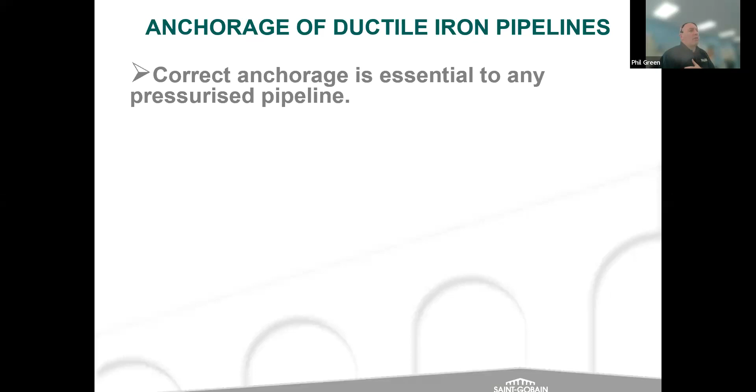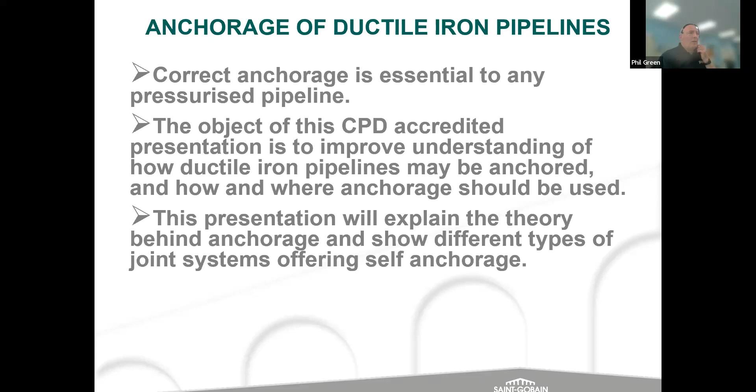Correct anchorage is essential to any pressurized pipeline. The object of today's presentation is to improve understanding of how ductile iron pipelines might be anchored, and how and where anchorage should be used. We'll talk about some of the theory behind anchorage and calculation processes, then look at different types of joint systems which offer self-anchorage, and at the end touch on a computer program we have that enables us to understand anchorage requirements on a project.

So this is all about how we might restrain push-fit pipes and anchor push-fit systems.

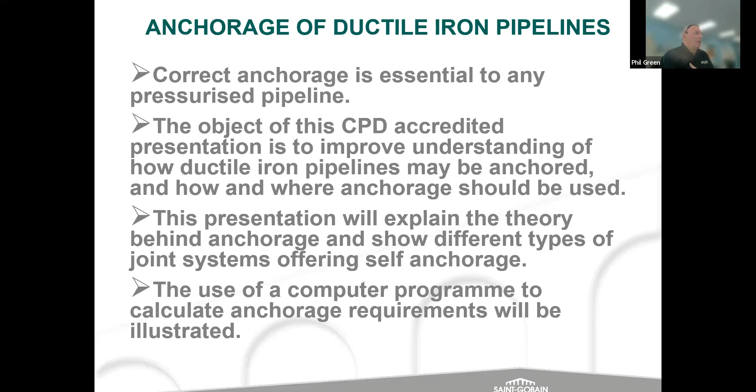Unless, of course, pipelines are laid in a dead straight line. There's an example here of a pipeline in Abu Dhabi, which Martin Addison knows a lot about, a long straight pipeline. Where there are no bends or T's or changes in direction, there'll be no sideways thrusts to encounter, so long straight pipelines often don't require anchorage. It's just about when you come into changes in direction or changes in pipe size or any other introduction of a fitting into a pipeline where you might need anchored systems.

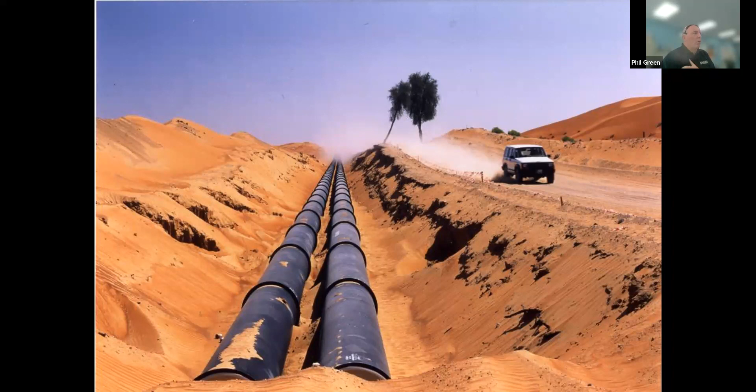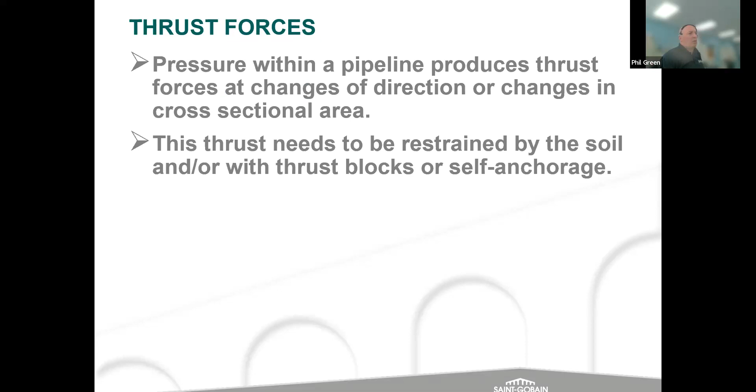So to understand thrust forces: pressure within a pipeline produces thrust forces at changes of direction or changes in cross-sectional area. These thrust forces need to be firstly understood and then restrained by the soil and/or with thrust blocks or a self-anchoring system. Thrust forces arise due to internal hydraulic pressure acting upon the cross-sectional area of a pipe.

The direction of the thrust depends upon the shape and orientation of the fitting. Thrust forces are calculated by the pipeline pressure multiplied by cross-sectional area, and that can be different depending upon the direction and shape of the fitting in a pipeline. So you could have bends, angles, T's, tapers, etc., where you'll get production of thrust forces that need to be understood. Any change in direction, you need to understand that.

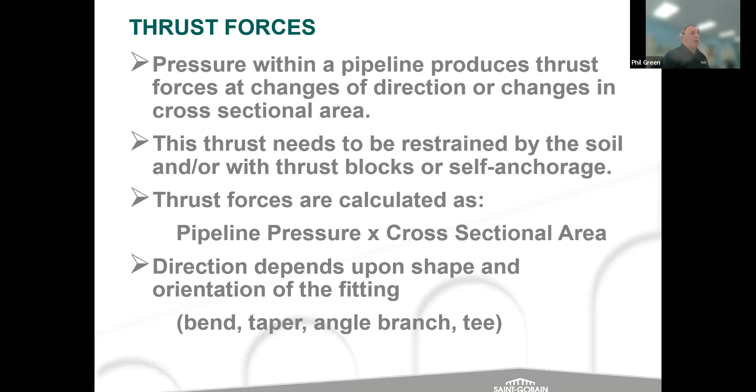But even at 100 millimeters, a 100 millimeter pipe would develop about a third of a ton of lateral thrust, and over 1 ton of end thrust at 16 bar. We've gone to the extreme to demonstrate the point, but even at small diameters, on a blank end at 100 millimeters at 16 bar, you still generate over a ton of thrust. So it's certainly significant and needs to be considered.

A little bit about anchorage theory. The theory is based upon equating the various forces that act on a buried and pressurized pipeline or fitting, using various safety factors.

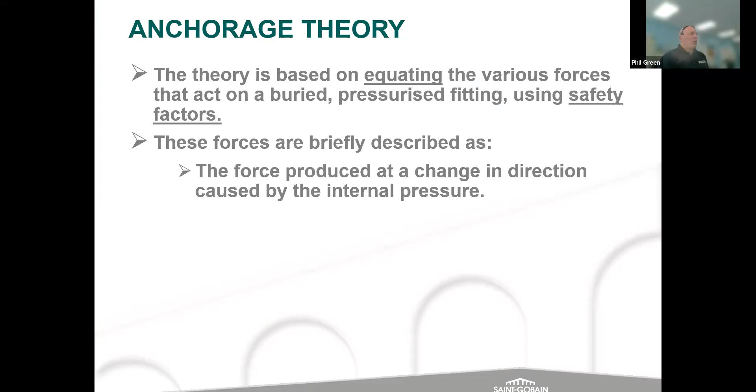These forces can be described as the force produced at a change in direction caused by the internal pressure, the passive force of the soil resisting the movement of the fitting, the frictional and cohesive force of the soil resisting movement along the anchored length of the pipeline, and the passive force of the soil against the anchored joints resisting movement. So in theory, we've got a force that the pressure pipeline produces, and then resistance forces of the soil and surrounding area and the cohesion of that soil on the pipeline.

So it's to understand the relationship and the mechanism between the force that's generated and the natural resistance of the soils and the ground cover that you've got, and understanding how you might need to supplement that resistance by anchored systems.

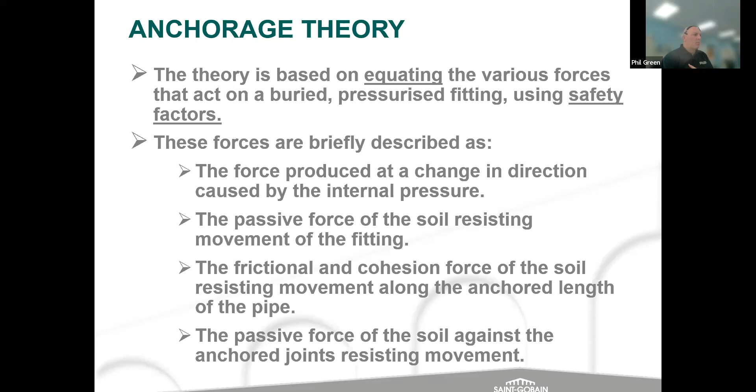So the calculation of the length of a pipeline or number of joints requiring self-anchorage is based upon the concept of ensuring that you've got a combination of the anchoring conditions of the soil restraint and the self-anchoring forces that you need to exceed the thrusts that you can generate at any point in the pipeline.

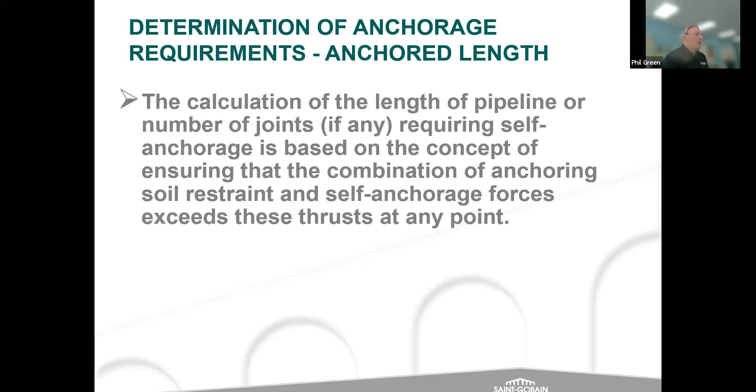So, as I say, it's based upon the concept of understanding and ensuring you have a combination of resistance to overcome the force that you're generating. Some of that resistance, as I mentioned, comes from soil forces.

So, passive soil resistance, you get that at bends and tees, etc. You get passive soil resistance of the pipe adjoining the fittings. You get passive soil resistance of the sockets of the pipe, because pipes and fittings have a socket, so the profile of the pipe at the socket end, as that's trying to move through the soil, will create some resistance of the socket movement through the soil.

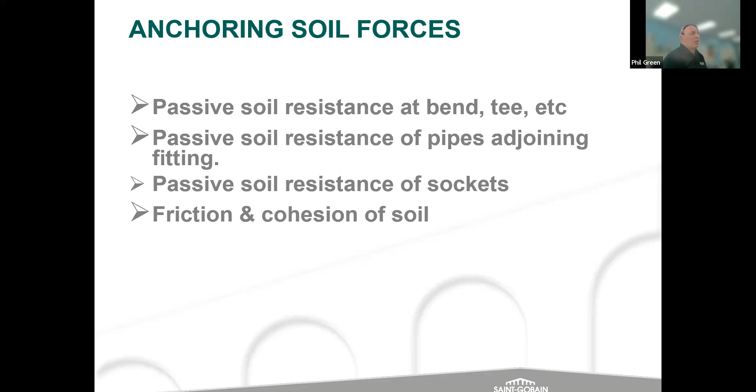And then you get frictional and cohesive conditions within the soil, which will resist movement of that pipe. Depending on the type of soil that you've got, there are different levels of friction and cohesion within different types of soils.

All these resistances are functions of the depth of cover, the soil density, the soil cohesion, and height of water table, etc. Because if you're in a very dry situation, you'll probably get more friction, because the soil tends to stick to the pipe more.

If you've got a water table, generally that acts as a lubricant of the soil between the pipe and the surrounding soils. So it'll reduce that friction. Therefore, you might need to anchor a longer length if there's presence of a water table.

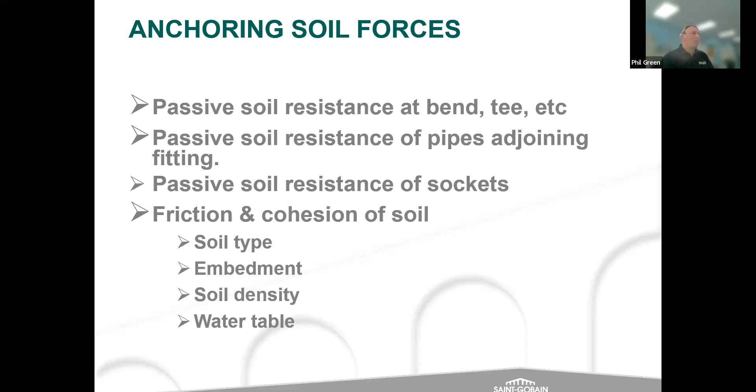So passive soil resistance is created as the fitting of the pipe tries to move through the backfill and the soil combination. And there's a theory around this called Rankine's theory.

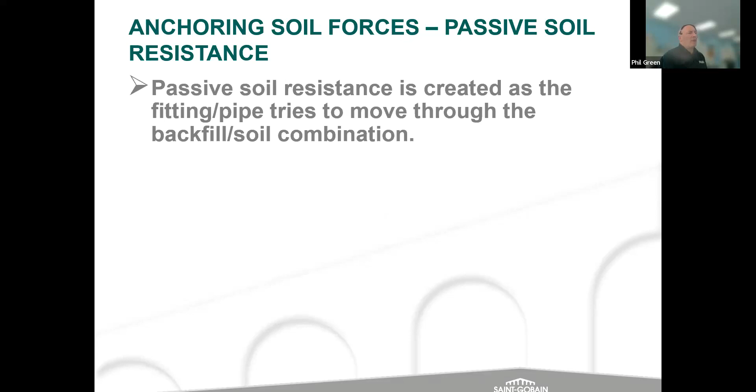Rankine's theory considers that the soil is to be in a state of plastic equilibrium, and makes some assumptions that the soil is homogeneous, isotropic, and has some internal friction. The resistance offered by the soil to an object pushing against it is referred to as passive resistance. So that's just the passive resistance of the soil in the ground.

So there's a theory behind that, and that's what that theory is built up on, to create that understanding of passive resistance.

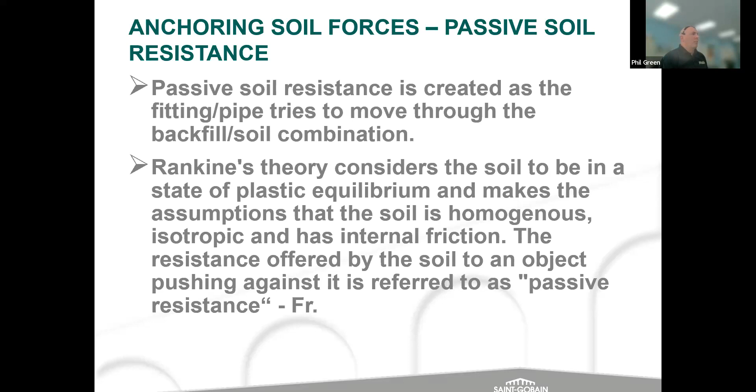You've then got frictional cohesive forces. These are frictional cohesive soil resistance created as the pipe tries to slide through the backfill or the soil combination. There's another theory around this, called Coulomb's theory.

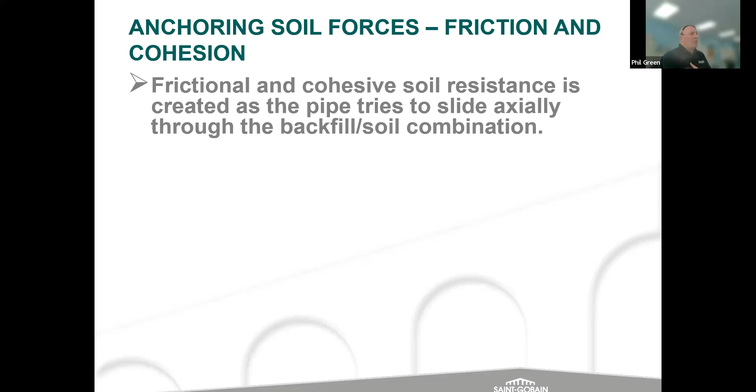Coulomb's theory suggests that the resistance is the sum of the frictional force and the cohesive forces. So Fp equals Fc plus Ff. The cohesive force Fc is given by pi d multiplied by the cohesion coefficient of the soil, and the frictional force Ff is given by pi times diameter multiplied by the product of the average radial pressure and the soil friction coefficient.

So there's lots of factors in there that we need to understand, which is to do with soil mechanics. But if you understand the soil mechanics, you can apply those soil mechanic figures to the anchorage system calculation, to define the system that you might need and the total length of anchorage in a pipeline.

All sounds quite complicated, as I mentioned earlier, but there are programs we can look at that simplify this process and take all these forces into consideration, using different specific soil conditions to enable us to understand what a condition might be for anchorage.

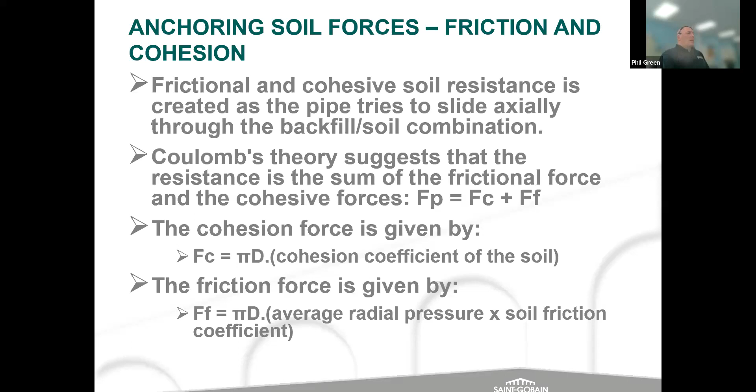So just to talk about how we calculate thrust, we've got thrust at a blank end or a valve.

As you can see there, the pressure thrust in a push-fit pipeline is determined using the external diameter of the pipe, referenced D, because the pressure acts upon the end of the spigot. In the case of valves, it is usual to assume that the pressure can act in both directions, i.e. you're going to need anchorage on both sides of a valve.

If it's a blank end, of course, you just work back from the blank end. If there's a valve in a system, it's often necessary to have anchorage moving away from the valve in both directions, just to mitigate that thrust in both directions.

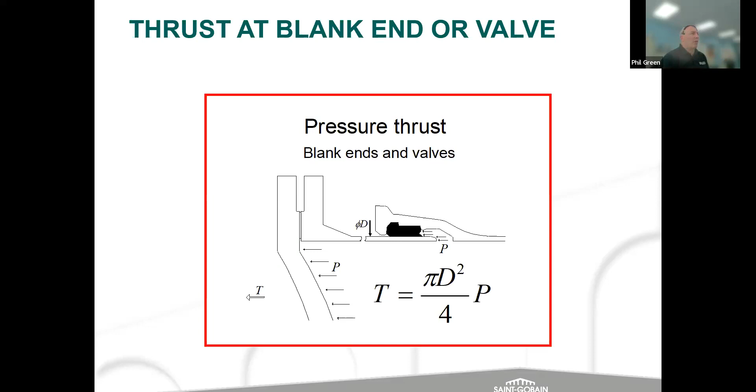Then we'll look at thrust at tapers. At a taper, the thrust is assumed to be the product of the pressure and the effective cross-sectional area. So what you've got is a subtraction of the cross-sectional area multiplied by the pressure divided by 4. That gives you what your thrust might be - a calculation that's quite straightforward to understand the thrust on a particular taper. There are various calculations for different cross sections of tapers, T's, and bends.

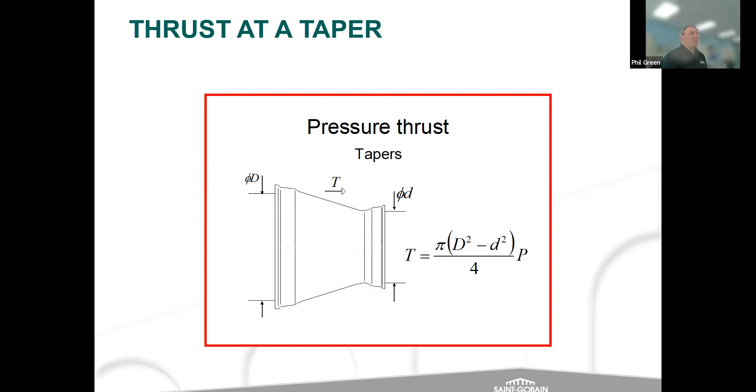Moving on, we talked about friction and cohesion earlier. Friction and cohesion in soils, referenced FP, acts upon the barrels of anchored pipes to oppose the pressure thrust. There will also be passive soil forces acting on the anchored sockets and a small amount of passive backfill resistance. Some of those passive resistances are small, but they all contribute and are included in the analysis.

In this particular slide, I've omitted the forces at the socket for clarity, but where you have sockets, you will get some resistance at the face of those sockets as well when that's trying to move through the soil. So all of those resistance forces are calculated and accumulated as part of the calculation.

And as I mentioned earlier, depending upon the soil types, the friction and cohesion forces will be different depending on whether the soil's stiff, firm, or soft, and whether a water table is present.

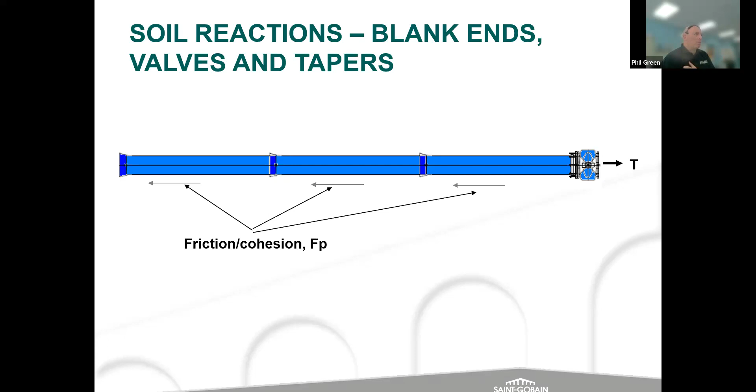Then we've got pressure thrust at a T. To understand a little bit more about the thrust at a T, it's the product of the pressure and the cross-sectional area of the branch pipeline. That's how we calculate pressure thrust at a T.

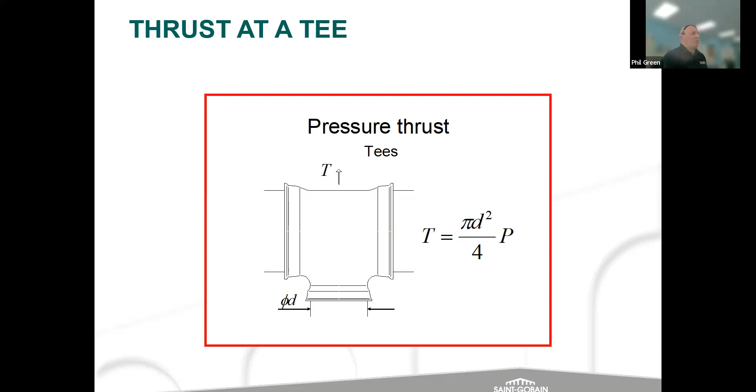The way that manifests itself, the force acting upon a pressurized pipeline at a T acts similarly. The T and the two adjoining pipes will develop passive resistance, classed as FR, which is passive resistance. There'll be a resistance to the soil trying to move that fitting and those pipes through the soil as they try to move laterally through the backfill.

The passive resistance FS will be developed as the sockets try to force their way through the backfill soil, and the frictional and cohesion forces FP will try to restrain the actual movement of the pipes sliding through the soil. Often there's no need to anchor joints in the main.

So where you've got the T section at the top and pipes in the main, often there's no need to anchor joints in the main because the joint deflections adjacent to the fitting are so small. It's just the movement down the branch that tends to be considered, so they don't pull those joints out and create a problem with those particular joints.

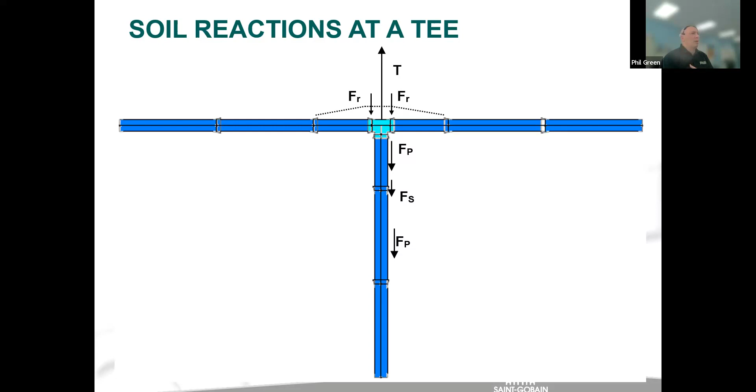Understanding the pressure thrust at a bend: the thrust is the product of the pressure and the cross-sectional area resolved in the direction shown. Depending upon the angle of the bend, there's a calculation that can define what that thrust is going to be at that particular angle.

And obviously it can have a 45, 22, 11, or even a 90-degree bend. So you input those dimensions or angles into that calculation to end up with the thrust calculation.

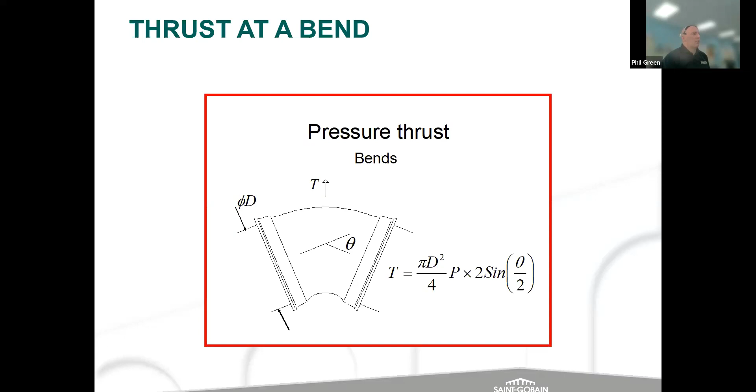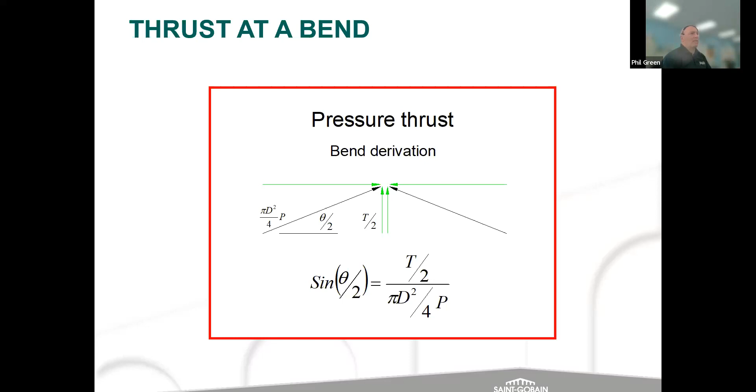And if you've got good ground and low pressure, often the ground itself will restrain the thrust. If the thrust is exceeding the resistance, then you have to think about an anchorage system, which we'll come on to later in a more detailed calculation.

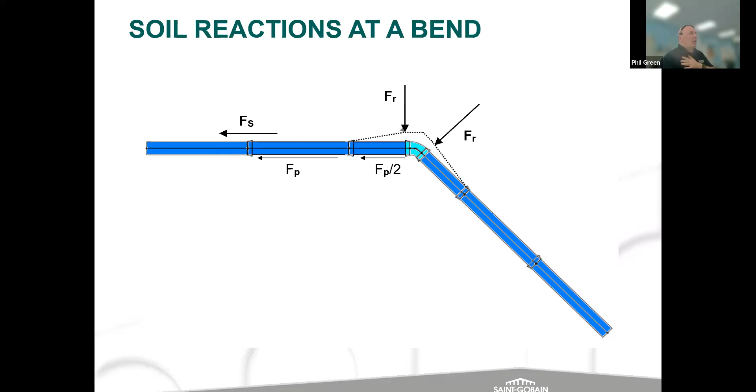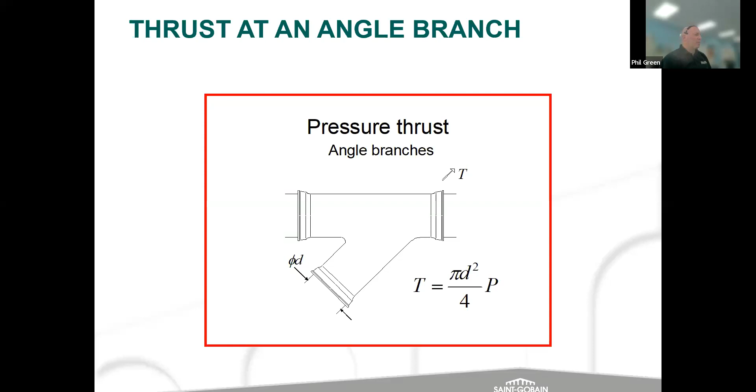But again, this just illustrates where the resistance forces come into play and what you need to consider as part of that calculation.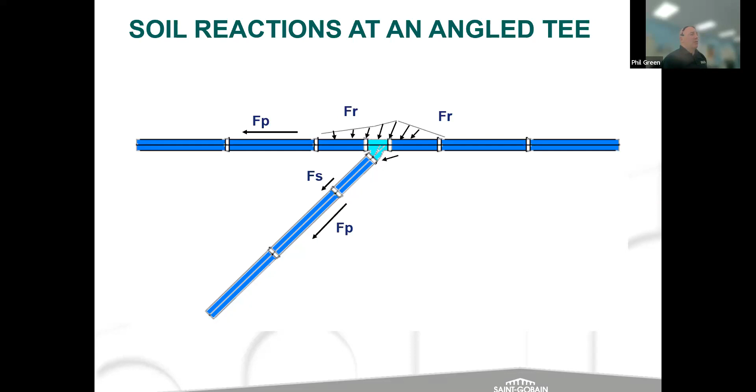So when you review that, we can see that pressure pipelines having push fit flexible joints are often subject to forces, and these forces, because it's push fit, can tend to try and separate. So the outcome of those thrusts can be that if the thrust is too great, you can separate the joints, i.e. you can pull the spigot out of the socket, where you've got those changes in direction.

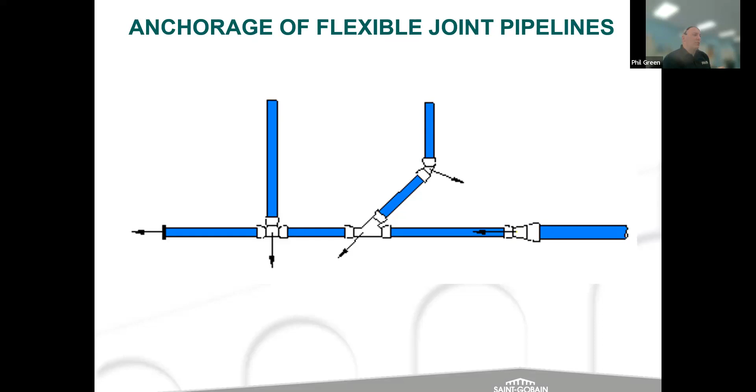So at these locations, some form of restraint might be necessary. In simple and more traditional terms, these forces can be restrained using concrete thrust blocks. What would normally happen is concrete thrust blocks can be put in place behind changes in direction, and that will be a simple method of anchoring that particular system.

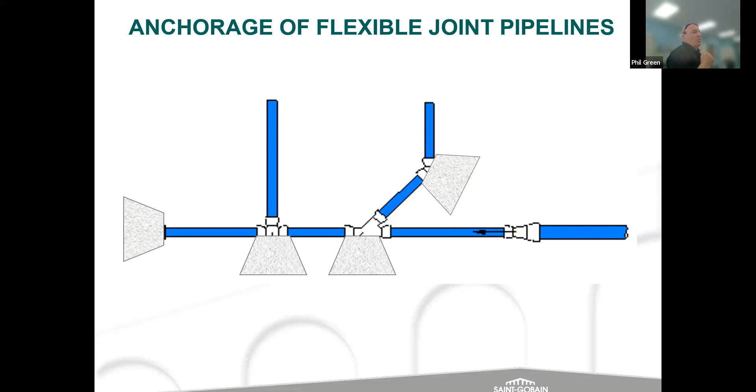And there's a report in the UK - I don't know what the guidance is in Ireland, forgive me - but in the UK there's a report called CIRIA 128, which is the guide to the design of thrust blocks for buried pressure pipelines, and that's what's used to understand how thrust blocks might need to be designed.

The challenge with thrust blocks is that in the CIRIA 128 guide, they take very little account of soil resistance. It's almost like the pipeline is, for want of a better term, in fresh air, so the concrete has to restrain the whole of that thrust. That can sometimes lead to huge requirements for concrete thrust blocks, which are sometimes quite impractical depending upon other services, depths of cover, or reuse of land that you're putting a pipeline in.

Moving forward, there's also a consideration for embodied carbon within concrete. Each cubic meter of thrust block designed is equivalent to approximately 200 kilograms of embodied carbon dioxide per cubic meter of concrete. So there's a huge consideration there about embodied carbon and reducing it.

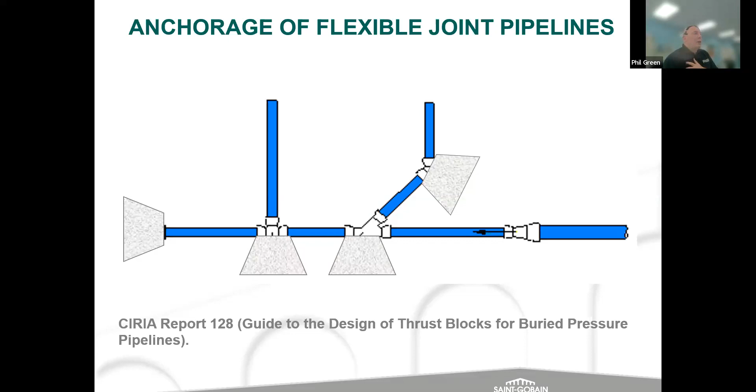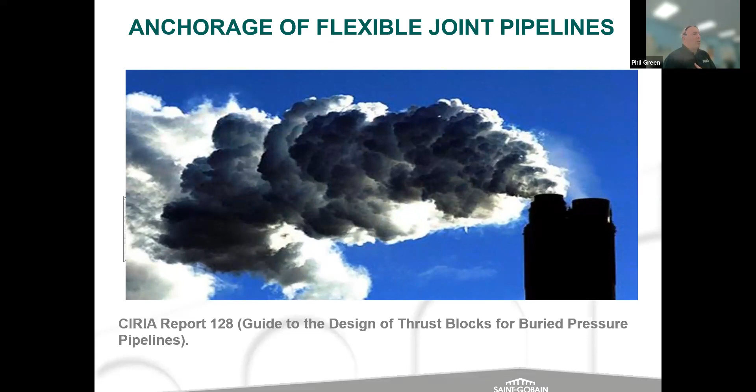Thrust blocks can be used, but with the sustainability agenda on all of our minds, it's about how we reduce the embodied carbon within that design to try and mitigate the use of concrete. Now, if you can't mitigate the use of concrete, you do need to use concrete thrust blocks. This diagram gives an illustration of where concrete thrust blocks can be used.

It's very much the same as Saint-Gobain PAM anchored systems. You can use them at horizontal bends, at blank ends, behind T's, to mitigate vertical thrusts on buried pipelines, and where you've got a gradient developing a thrust. So the traditional means of using concrete thrust blocks can still be done.

But what we have solutions for is instead of concrete thrust blocks, we can provide anchored joint systems, and we have a range of anchored systems that we'll go through later. There's an alternative to concrete that we can introduce to pipelines that will enhance your sustainability score by mitigating embodied carbon in your designs.

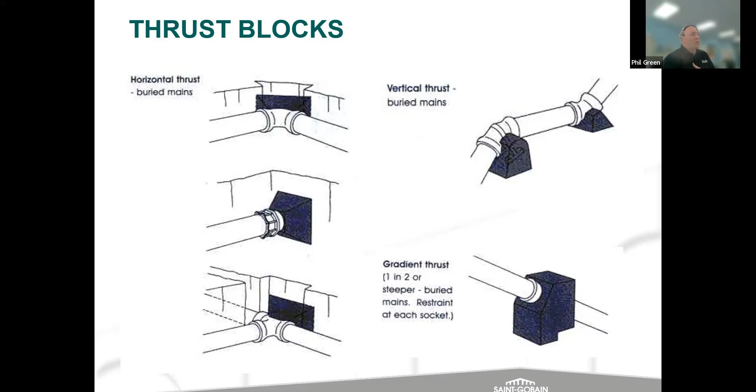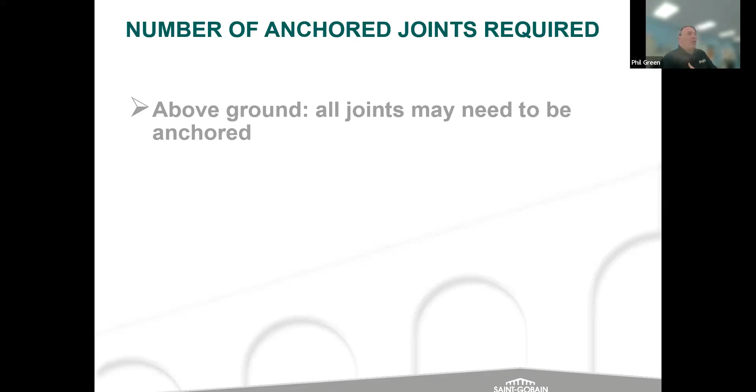To understand the calculations, how we determine the number of anchor joints required, there are a few guidance notes. Where you've got pipelines above ground, which may be on plinths or whatever, because there's no passive soil resistance to those, often all joints might need to be anchored. The use of anchor joints is an alternative to traditional anchor blocks. Where you've got very soft or unstable ground, or where there's little space due to existing services or steep slopes, you can use these anchored systems.

To satisfactorily achieve anchorage using self-anchored systems, it's rarely sufficient to anchor the fitting alone, since this will only move the location or possible separation further down the pipeline. So although it's not normally necessary to anchor all buried joints, we need to do the calculation to understand how many joints away from a bend you might need to anchor to mitigate the thrust. If it's above ground, all joints might need to be anchored. If it's buried, rarely all joints need to be anchored, but you need to do a calculation to understand it.

That calculation gives us the number of anchored joints developed away from a bend, and it can be quite complex. It's not proportional to the internal pressure. So if you had, say, 5 meters of anchorage for 5 bar, it wouldn't be 10 meters of anchorage for 10 bar. There's a quite complex calculation to that. So it's not linear, it's not binary. It's unique to each particular situation that you have. So it can be quite complex.

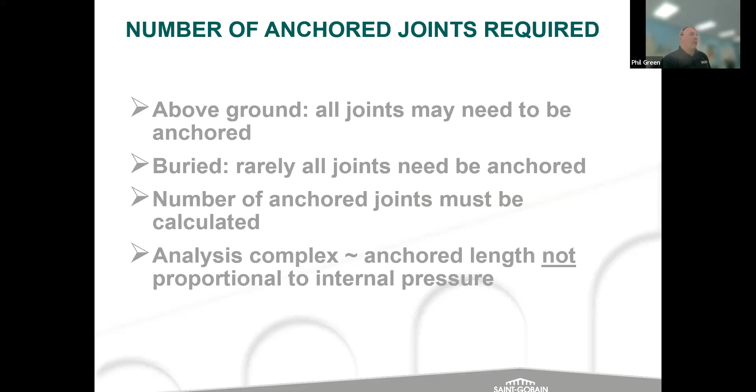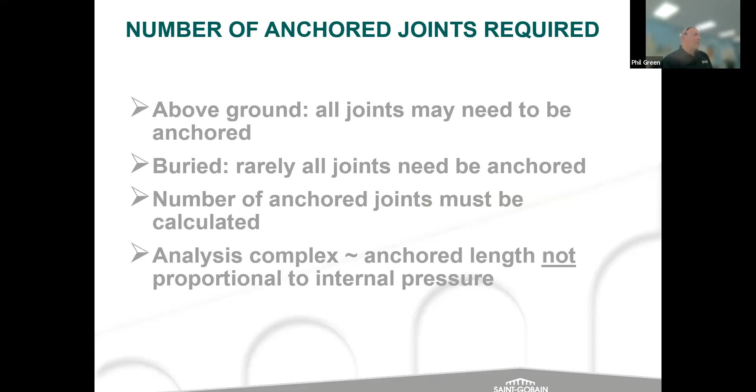As I mentioned earlier, we have a calculation, or a piece of software, that we can use to help understand and define what that anchorage requirement might be. So I'm going to go through a sort of example of a calculation.

When calculating anchored length or the number of anchored joints required, it's normal to apply a factor of safety of 2 to the working pressure and 1.5 to the test pressure, and the pressure to be restrained, P, is the greater of those two parameters. So it's either 2 times the working pressure or 1.5 times the test pressure, whichever is greater, is the pressure used as part of the calculation.

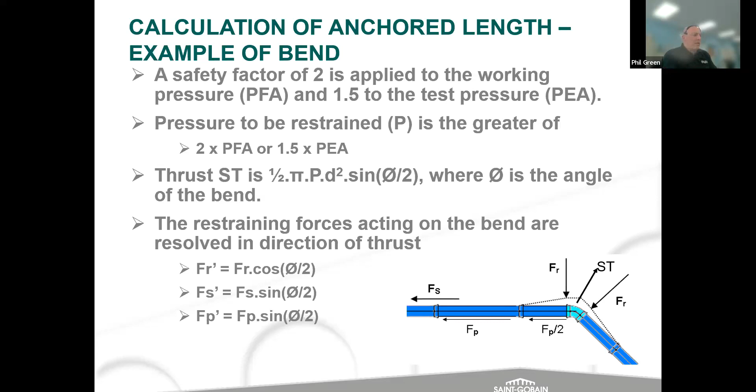From those calculations, there's a set of parameters that we then apply to understand the amount of anchorage that might be required. If twice the passive backfill resistance resolved in the direction of the thrust is greater than the thrust, then no anchorage is required. So basically, we've got enough residual thrust restraint from the soil, the depth of cover, and the passive resistance of the soil in the ground.

And often that can be very stiff clays, very low pressure, very small diameter. Generally, you can get away, if that's the right word, with no anchorage.

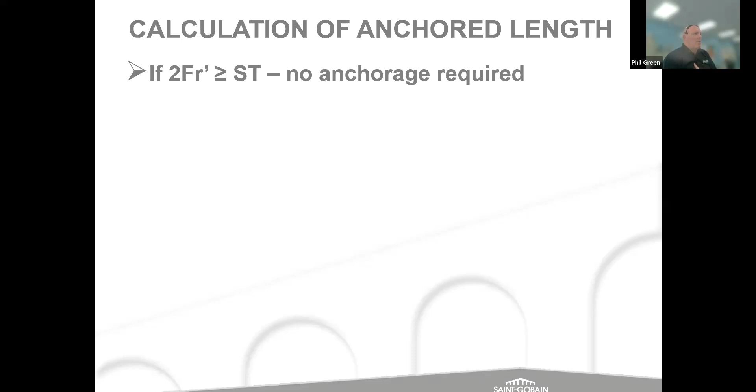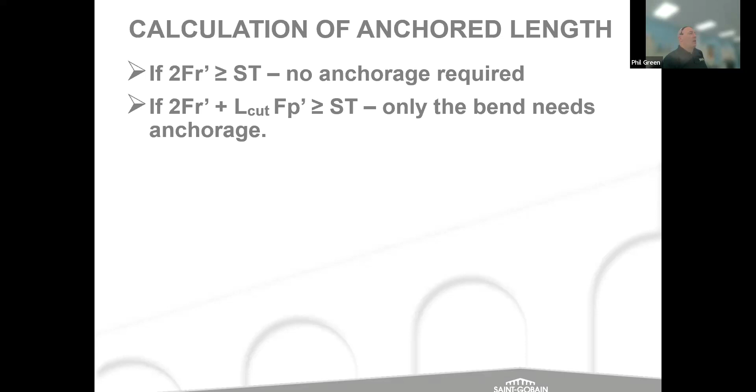However, if twice the passive backfill resistance plus the frictional and cohesion soil restraint forces on the cut pipe resolved in the direction of the thrust is greater than the thrust, then only the bend needs to be anchored. So there's a bit of a calculation to understand if 2 times that requirement is equal to or greater, then only the bends need to be anchored.

And if the thrust is greater than the second value, then the anchored length is given by the equation shown there. Basically what that takes in is a length of cut pipe, length of bend, plus a number of parameters for the total length that requires to be anchored. Again, it can be quite complex, but we have a calculation tool that defines and configures what that requirement might be. But all of this is just to give an understanding of the logic behind the calculation.

We have a calculation tool called PipeSpec where you can carry out anchored length calculations. We've also got a PDF of the longhand calculation methods, because often if we share outcomes with an engineer or a designer, they'll say that's great, but I need to see the longhand version so I understand the mechanics behind it. So again, we've got longhand calculation PDFs of all this. If you really want to, you can work through that yourself using the PDF as guidance, but it's a lot easier and quicker to use the PipeSpec software that we have.

So that's how anchored length is calculated, and the various rules that define what the anchored length might be. And of course, the greater the pressure in a pipeline, often the longer the anchored length. So this is very much dependent on pressure, soil, depth of cover, and type of soil, as we mentioned earlier.

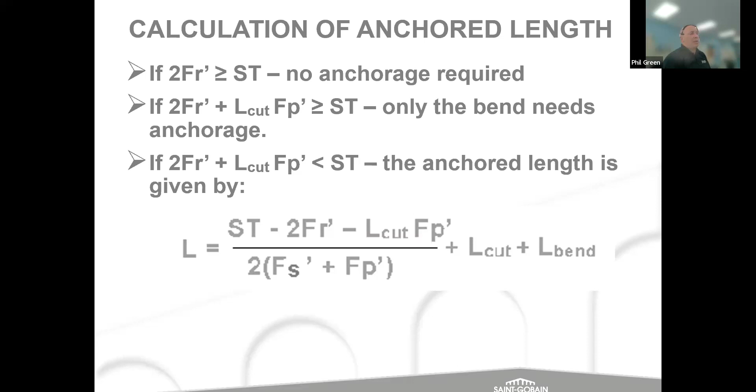So once you've calculated the anchorage, it's useful to understand the types of anchored joints that are available. From a Saint-Gobain PAM perspective, I'm going to talk through a few of our anchored systems that are available now. You can use thrust blocks if you want to, but if you don't want to use thrust blocks, there are alternative solutions available.

So the first one we'll look at is what we call the rapid anchor joint. Basically what this is, what we've got here is a cross section of a pipe and a fitting. Excuse me a moment. So what you've got shown here is the socket and the spigot connection.

The gasket there is shown in black, which for water is an EPDM rubber, and within that rubber there are anchors, stainless steel anchor teeth, which sit within that rubber and bite into the outside of the spigot. So basically, the red element is a stainless steel anchor tooth which sits inside the gasket. When you make the joint, that bites into the spigot to stop it pulling apart, and grips the spigot tightly to prevent actual withdrawal.

So basically, the pressure capability of these joints is listed there, and it's generally compatible with the majority of water supply operations, which tend to be between 6 and 9 bar. Also, this joint is capable of angular deflection - up to 5 degrees of deflection, depending on the size of the pipe. At small diameter it's quite a high pressure system; as you get through the size range and it becomes bigger, the pressure capability reduces slightly, because the greater the diameter, the more anchor teeth are required. So we downgrade the pressure requirements to ensure we don't overstress the gasket and the joints. We've listed up to 600 on this particular table, but it's also available in 700 as well at 10 bar.

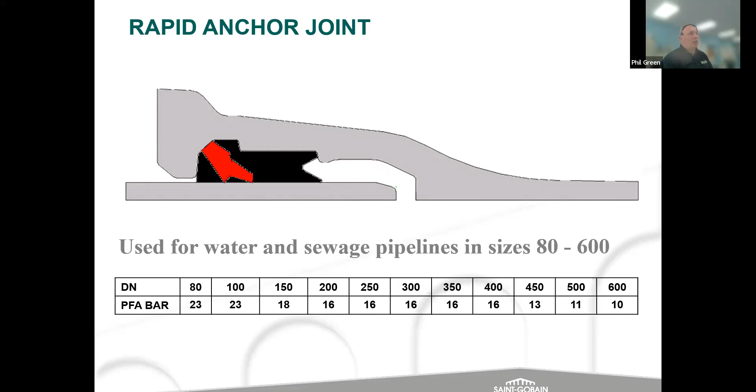We've then got what we call the mechanical anchor system. And this is, if you like, the more traditional double chambered system that we have. This is generally being phased out now because we've got other solutions that are better than this. But with mechanical anchor, you might have pipelines in the ground that are jointed by the mechanical anchored system.

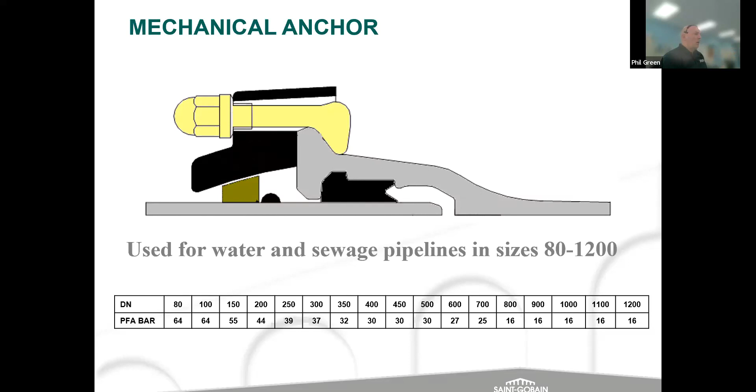For large diameters, we've got what we call the PAMLOCK joint. This is available in 1400, 1600 and 1800 pipe diameters. This is quite a specialized joint. It's got a segmented locking ring. It still uses a weld bead on the spigot end of the pipe, but it's got a segmented locking ring, and then it's got like an internal clip that sits behind that locking ring.

And what you can see behind that red clip there is that there's an annulus in there which is basically filled with shot to complete the joint. And what that shot does, it fills the annulus, stops the red locking ring moving around, and prevents the whole thing coming out of the joint. And then that's locked off with a seal to prevent the shot escaping from that void. So the whole thing still works as a ball joint, but it can be quite complicated to joint. So it does need some time to make each joint, but it does the job and it's capable of the pressure ratings that you can see there.

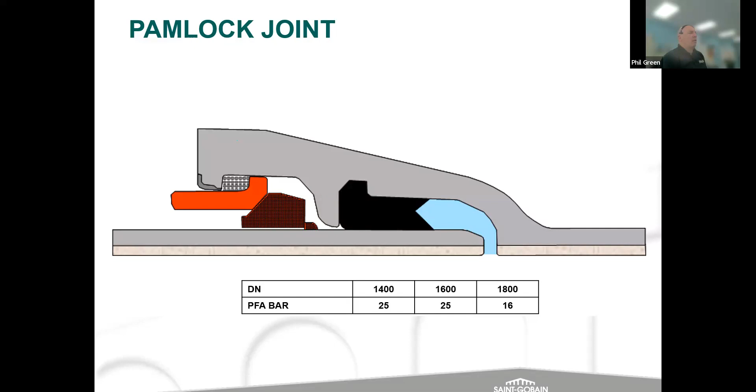Now, a lot of the challenge of these are that they can be quite fiddly to join. So what we've also got is a range of other systems called double chambered locking systems, called the universal range. So basically, the universal range is a double chambered joint. In the first chamber to the right there, you can see the gasket, which affects the seal, stops water escaping, gives you the pressure capability that you're looking for there, of 60 bar at 80 up to 16 bar at 600. And in the second chamber, you've got what we call a carrier gasket with anchor teeth in it.

And what happens there is that carrier gasket sits in that second chamber where the red anchor teeth are, locates into the outside of the pipe, and again locates into that angled section to engage in that angled section and stop the thing pulling apart. So you've still got that engagement of teeth in the spigot end of a pipe to stop the thing pulling apart. And that's what we call our universal VI joint.

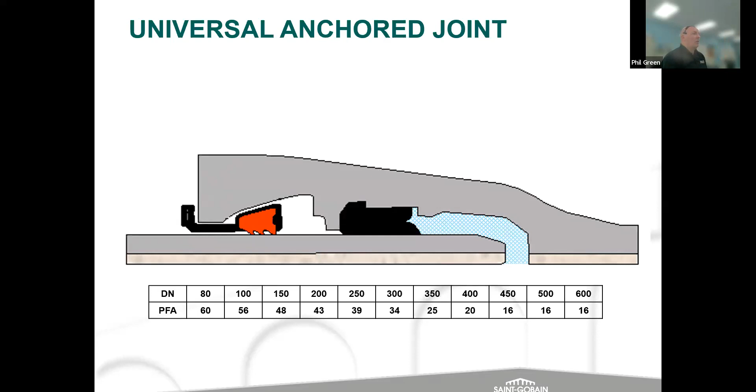As a derivative of this and an addition to this, we've got what we call our universal VE locked joint. This uses the same pipe profile, so you've got the same pipe profile as with the gasket version. You've got a double chamber in the socket end of the pipe, and the water seal is made in exactly the same way.

You've got the black gasket there that affects the seal, stops the water escaping. In the second chamber, you've got what we call the locking ring, and the red semicircular piece there is a weld bead on the outside of the spigot. All those things work together: the weld bead locates on the red locking ring, which locates on the inside of the second chamber, and again stops the whole thing pulling apart.

As you can see on this particular joint, it's capable of much higher pressures than the anchored systems, because this is a physically locked joint, so the pressure capabilities of this are higher. Now on this particular slide, it illustrates that the highest size is 1200. We've actually developed this further now, where it's available in 1400 and 1600 at 20 bar. So again, big pressure, big diameters. We've got a solution for that, and that solution mitigates the need for the PAMLOCK joint that I showed earlier, because this is an easier joint system.

And the benefit of this joint, and the previous one I showed you, is it's boltless, so you don't have to go down the trench, you don't have to fasten bolts up, you've not got a guy down there fastening and torquing bolts up to an agreed requirement. It's a locking ring, and there are wedges to enable you to joint that correctly, and a method of installation so that you can take the clips out. The locking ring then grips on the pipe and locates behind the weld bead to create the locked system.

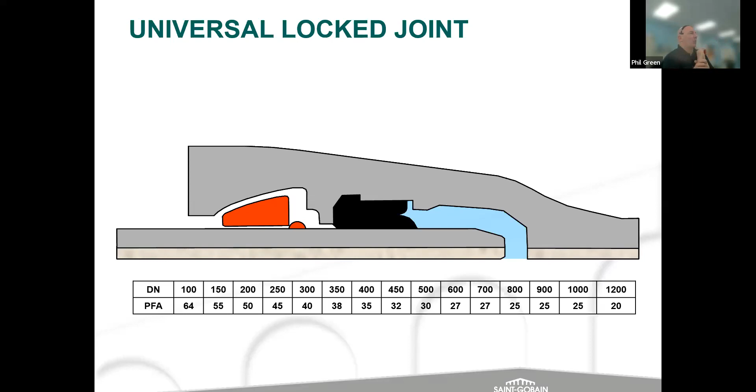Another couple of derivatives that we've got: there's one here called the V+i joint. We tend not to use this. It's a combination of the gland piece and the anchor gasket carrier. This tends to be used in France a lot, but certainly not in the UK. It's just something to illustrate that there's another alternative, but it's not well used, certainly not in the UK and Ireland.

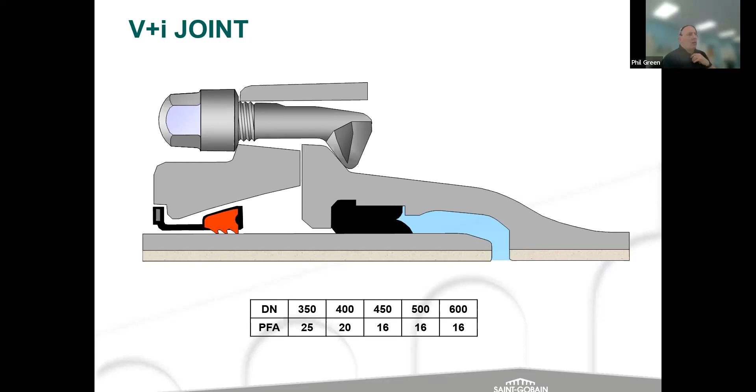Moving on from that, we've got flange joints. So far we've looked at anchored systems, which have a degree of flexibility, and the whole point of those anchored systems is you can still have ground settlement, they can still accommodate it. You've still got up to 5 degrees of angular deflection in those joints to mitigate ground settlement. When you look at flange joints, these joints have flat mating surfaces and they're bolted together, and the pressure is retained by the gasket between the faces. So with flange joints, you don't have any flexibility.

Now the diagram we're showing here is a fabricated flanged pipe joint. Some of you may be familiar with this because we manufacture these in our facility in the UK. What we do is we have cast flanges. We machine the flanges to suit the outside diameter of the pipe. We then heat shrink those flanges onto the pipe, and then we apply a weld bead, and the combination of the weld and the heat shrink keeps that flange on the end of the pipe and complies with the requirements of EN 545.

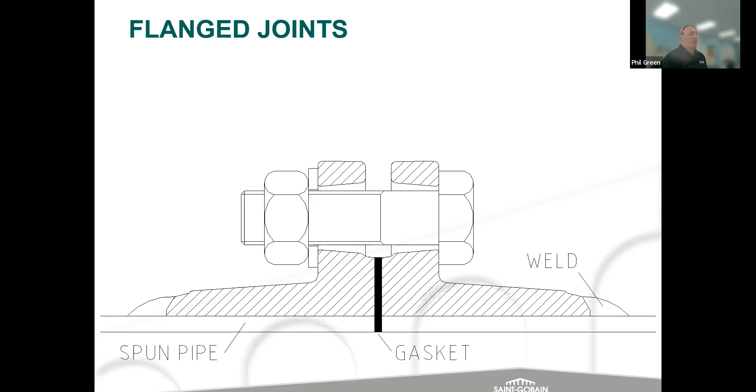So that's basically a flange joint, and we don't recommend that these are buried, or if they are buried, you have to mitigate any potential for angular deflection on them. To give a quick overview of flange joints, they're rigid and self-anchoring. They don't have any flexibility. They're often used when you've got a pipeline design, often adjacent to a valve, for example. You might have a valve in a pipeline with a flange socket and a flange spigot coming off either end. So you are incorporating flanges, but we'd always recommend you put a rocker pipe close to that so you don't impose any stresses onto those flange joints.

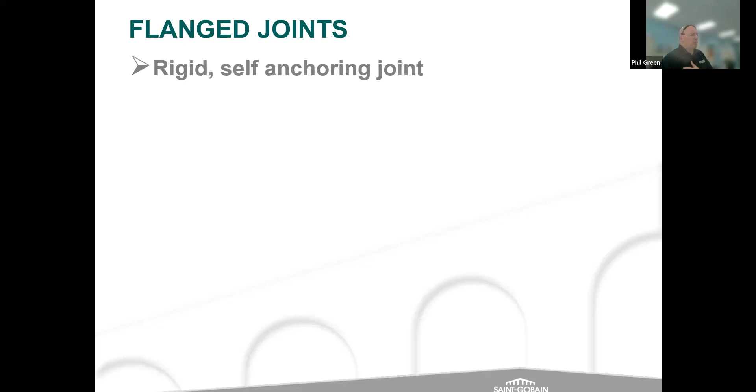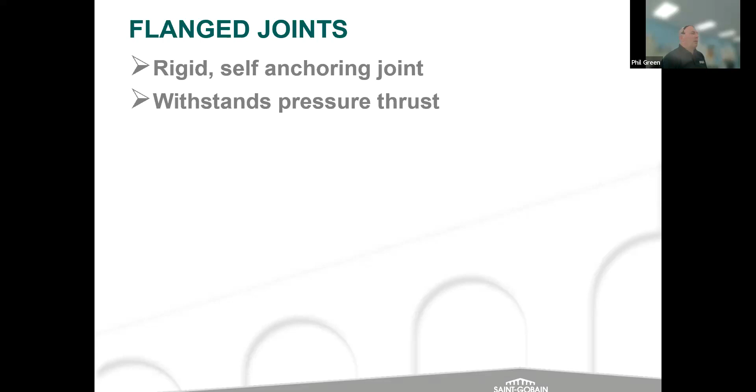It does withstand the pressure thrust. Standard pressure ratings for flanged pipes are PN10, PN16, PN25 - that's 10 bar, 16, 25 bar. And I think the standards that you guys use over in Ireland are PN16, and that's the standard we supply from our UK manufacturing perspective. The bending moments are limited by the sealing capacity of the joint and by the material strength, so a combination of flange bolts and gaskets indicate what that sealing capacity is.

Again, we don't recommend you exceed those capacities, because flange joints have no capability for flexibility, so any loads imposed upon them will be directed to the bolts or the flange itself, potentially overstressing those. As I mentioned earlier, you've got to try and control bending moments to safe limits.

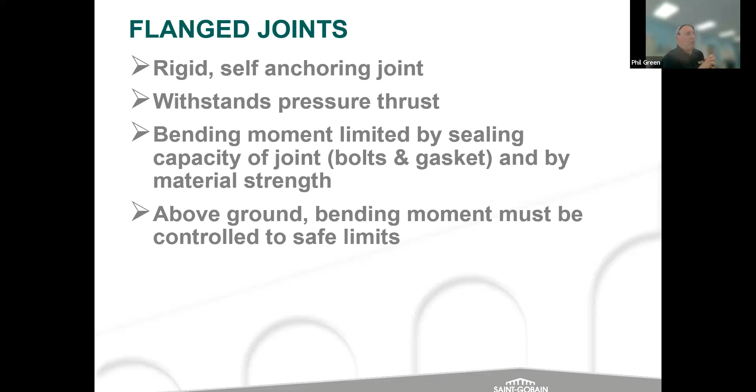So above ground, we recommend that you put these on plinths, or support them on hangers or whatever it might be. And then below ground, unless a flexible joint is located near the flange joint, i.e. a flange socket or a flange spigot, flange pipes should not be buried.

Now, it's quite a statement, that is. We often know that pipeline designs require you to bury flanges in some circumstances. If that's the case, we would recommend you put a rocker pipe in, or put a flange section on a plinth, and where you move off a plinth to buried, you then put rocker pipes in there to accommodate any movement or flexibility.

Because often, certainly when you're transitioning between materials, a challenge we find is that if you're transitioning from a ductile iron section to, let's say, a polyethylene section, with a stub flange of polyethylene and a flange of ductile iron, those are always the areas where you have to take extra care, because they're the points at which those connections might fail. If they're going to fail, that's where they'll fail. So it's really important that care is taken on flanged sections and interfaces between different materials which are flanges.

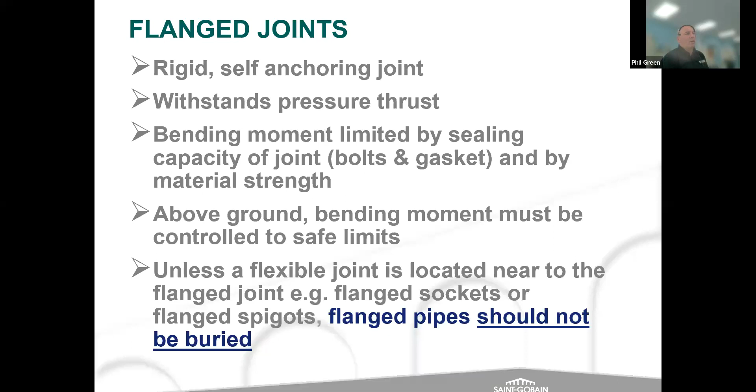So from a ductile iron perspective, from a flanges perspective, for potable water, gaskets are EPDM. For sewage systems, gaskets are nitrile rubber. There's an 80 international IRHD - International Rubber Hardness Degrees, I think it stands for - hardness of gasket. And there's a set of properties for the rubber in accordance with EN 681-1.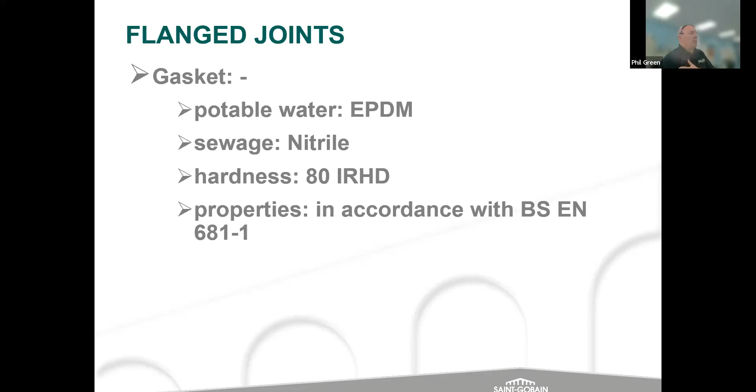So for flange joints, there's a number of guidelines to follow that we issue as part of our recommendations, but those are some of the principal examples of references we use when we talk about flange joints.

Again, flange joints, when you're bolting them together, we always recommend that you lubricate the nuts, bolts, and washers, using an EP oil. Often, certainly from a UK perspective, there are approved jointing systems you can use to lubricate nuts and bolts when you're jointing them.

And the rationale for lubricating them is that you can then transfer the torque, the load, when you're torquing the bolts to the sealing face, rather than the torque going to overcoming putting the nut on the bolt. So that's why we suggest you lubricate the bolts.

I lost my cursor there. We'd always recommend that you use the correct torque and a calibrated wrench, and you tighten bolts in the correct sequence.

So flange joints are slightly different, potentially could be slightly more difficult to connect than push fit systems, because you have to follow a number of parameters. But that's an overview of flange joints as well.

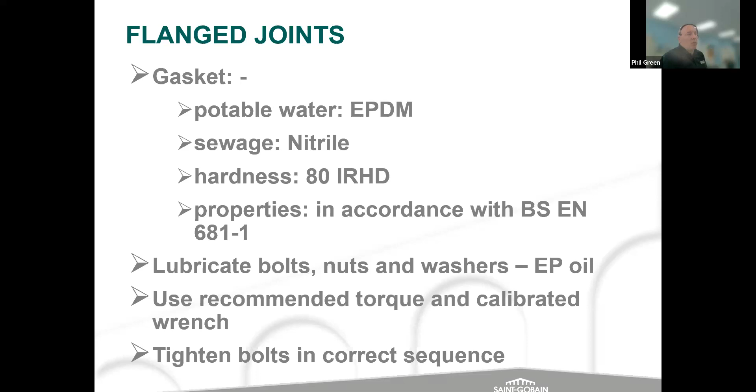Now, for all those push fit joints that I talked about earlier, Saint-Gobain have a YouTube channel. So if you wanted to understand and see how those other joints are made - the push fit system, the standard VI, the universal VE - you can search for those, or I can send a link you guys can look at, the Saint-Gobain YouTube channel, which gives animations and illustrations of how those joints are made, which might be useful to understand and overcome any questions you might have.

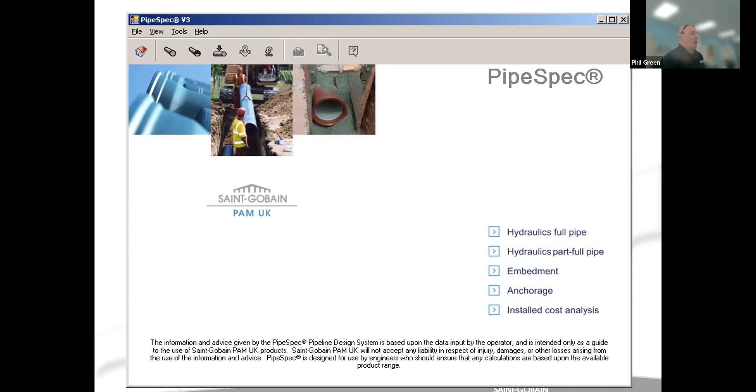So just in terms of anchorage, we've got a piece of software called PipeSpec that we use to calculate anchorage requirements. Basically, the PipeSpec software can do a number of things: hydraulics, part full pipe, you can look at embedment requirements. There's an installed cost analysis you can do by putting your own numbers in. That's a piece of software we've got that you can use for calculation, which I believe is downloadable from our website. So again, I can send you a link for that.

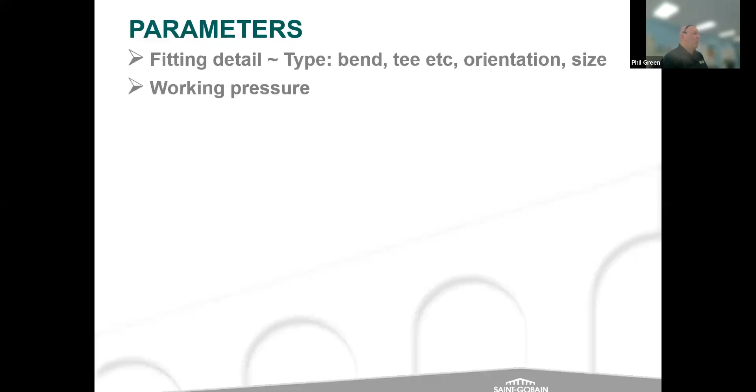In terms of the parameters required for calculation, we need to understand the fitting details, the working pressure, the test pressure, what coatings there are on the pipes, depth of cover, width of trench, what the side fill materials are, and the height of the water table, for example.

All those are parameters that we're interested in when we're trying to understand what the anchorage requirements are. So all of the things we spoke about earlier about frictional resistance of soil, type of soil, water table, they manifest themselves in this information here, which is what we input into the calculation tool to give us some outcomes.

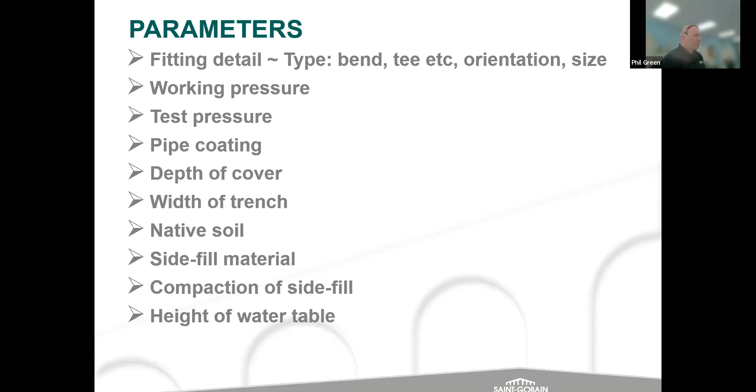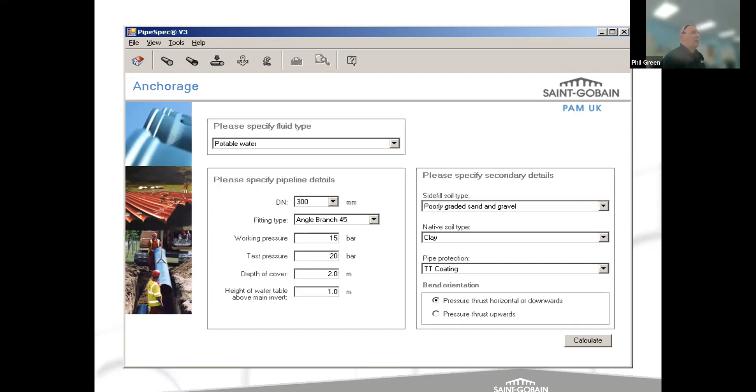And we've chosen some different soil parameters. Native soil is described as clay. The backfill is poorly graded sand and gravel, and the pipeline is coated externally with what we call our TT coating, which is a thick extruded polyethylene coating on the outside of the pipe. So that's the parameters we put into the calculation, and that's what gives us an outcome.

The results of the calculation in this case suggest that anchorage will be required on both the angle branch pipeline and the main pipeline, and the anchorage can be achieved by using one of the different self-anchored systems we spoke about earlier. In this particular example, anchorage in the main means a length from the center of fittings of 24.3 meters, and the anchorage in the branch is a length measured from the center of fitting of 18.6 meters back down the branch.

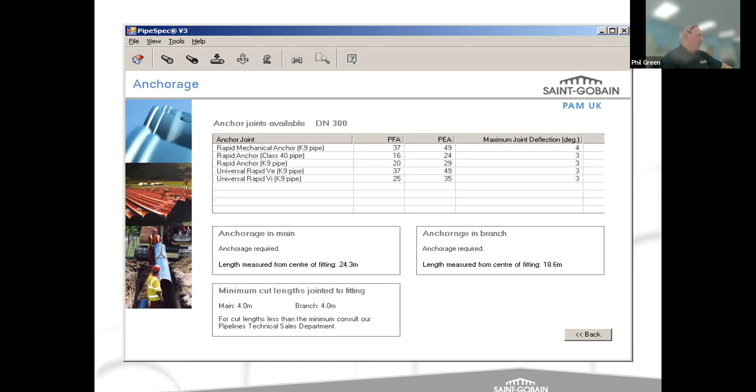So you have to then calculate what that means in terms of number of joints. If you're using a 6-meter pipe, you can build that in to say how many pipes and anchored joints you need, and once you've gone beyond that 18.6 or 24.3 meters, you can just go back to standard push fit systems, because that thrust will dissipate over that length, so you're not imposing thrust further down the line. That's basically the way anchorage is calculated, and a tool that we have to do that.

As I mentioned, we've got some free software that you can download from the Saint-Gobain PAM website, and find that information on there. So to summarize...

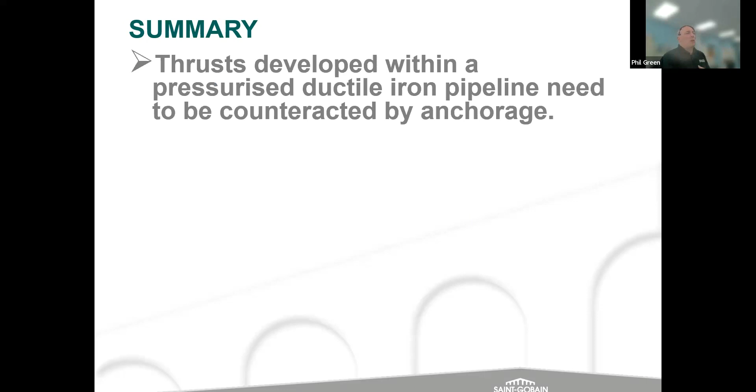Thrust can be developed within a pressurized ductile iron pipe system, and they need to be counteracted by anchorage. This anchorage can be in the form of concrete thrust blocks or self-anchored joints.

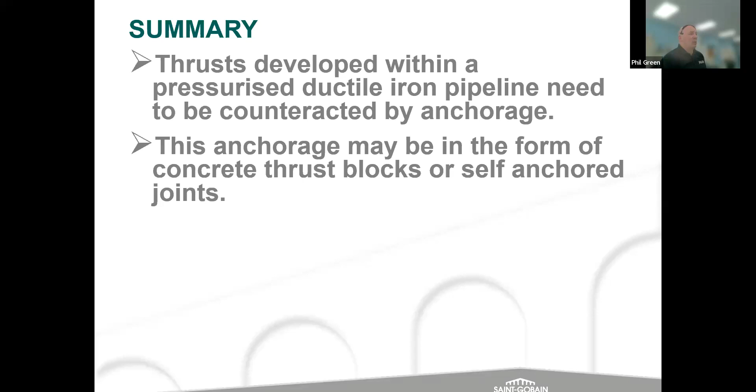And as I mentioned, the use of concrete does impose a lot of embodied carbon. So often these days, people are looking at alternatives to that, which is the anchored systems or self-anchored joints that we can provide. Often they can be more cost effective and significantly reduce the carbon dioxide emissions.

Another benefit of anchored systems is that you can continue to lay. If you put an anchor gasket in a pipeline or a universal VE system in a pipeline, you can continue to lay. If you put a thrust block in, often you have to build your shutter, pour your concrete, and wait for the concrete to go off before you start laying or continuing to lay and testing against it. With anchored systems, you can continue to lay and test straight away. You don't have to wait for concrete to go off, and you've not got that movement of concrete to and from the site as well.

Finally, the calculation of anchorage can be complex, but there is help in the form of a software package if you're interested. I know Martin's worked with engineers in Ireland and Irish Water, where we've looked at projects and talked about some of the parameters we've discussed today. We've fed those parameters in, and we've been able to optimize designs around anchored systems using the understanding of soil types and pressure capabilities, applying our knowledge to that scenario to define the optimum solution for anchorage.

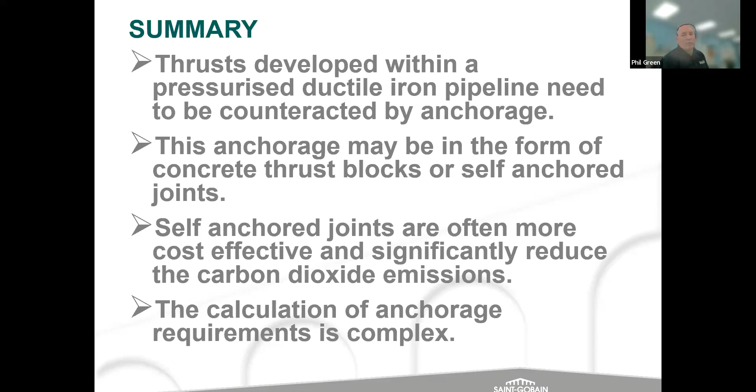So that's me. Again, bit of a whistle-stop tour, as most of these presentations are, at a headline level. We'd certainly welcome the opportunity to talk in more detail if you've got projects.